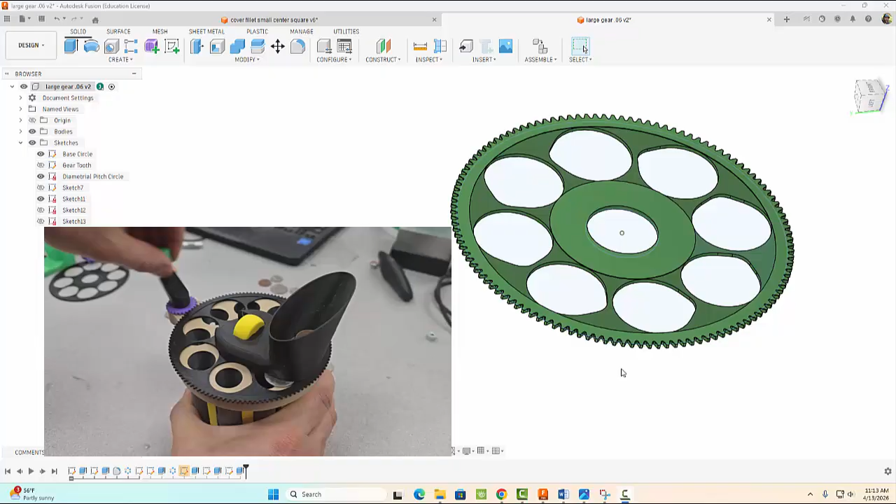In this video tutorial, I'm going to show you how to design the large gear seen here for your coin sorter. So whenever you're ready, let's go ahead and get started.

Alright, so the first thing you want to do is come on up to File, let's do a new part design and select Create New. And to make our gear, we're actually going to use an add-in. So we're going to come over here to Utilities, Add-ins, Scripts and Add-ins, and let's select that guy right there. And then we're going to come on down to Spur Gear, and we're going to hit Play.

And this is a pretty cool feature. It'll make an involute spur gear for you based on these features right here. All right, so we need to go in and edit these values to make our gear. The first thing to consider here is our units, and we can use metric or English. We're going to go ahead and stick with English or standard units.

For our pressure angle, we're going to go with 20. That's a pretty common angle. And then for our diametrical pitch, we're going to set that to 26. All right, the next thing we need to consider is how many teeth on our gear, and we're going to put 120 teeth on there.

And for our backlash, think of that as the clearance gap, the gap between our two teeth. And we want to have a little bit of a gap of about 1 thou or 0.001. For our root fillet radius, we're going to set that to 0.02. And for our gear thickness, that is going to be 0.06. And then for our hole diameter, we're going to set that to 0.98. Once you have all these values, go ahead and select OK and watch the magic begin.

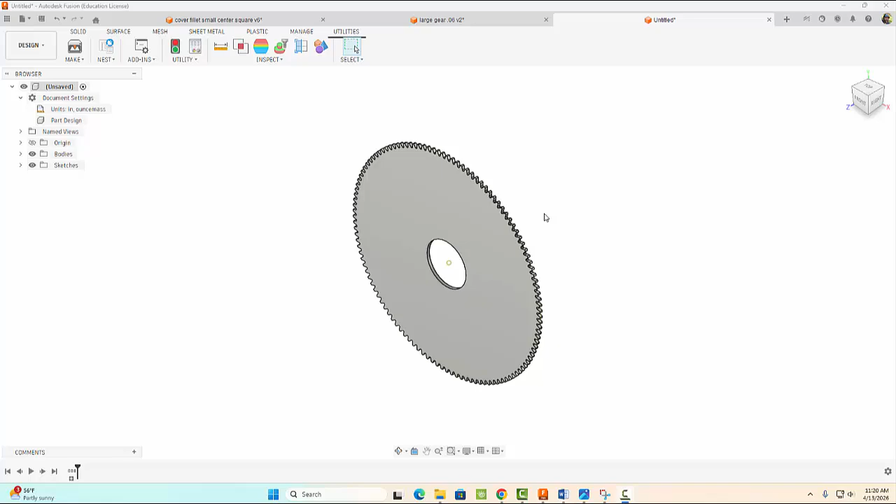All right, and here is our wonderful gear. Let's come on back to solid. Let's go to inspect. Make sure the thickness is in fact 0.06, and it is 0.06. Let's do another inspect. Make sure our hole diameter here is 0.98, and diameter is 0.98. Looks good. All right, now let's go ahead and start a sketch here on this surface right here.

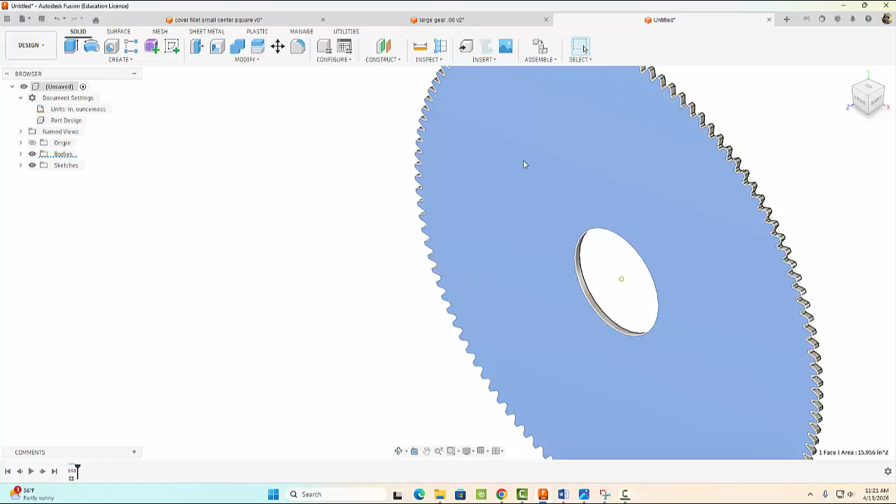All right, the first thing we want to do is do a construction circle. So we're going to go to line type and select construction, coming over to our circle drawing tool and create a construction circle with a diameter of 3.1. Enter.

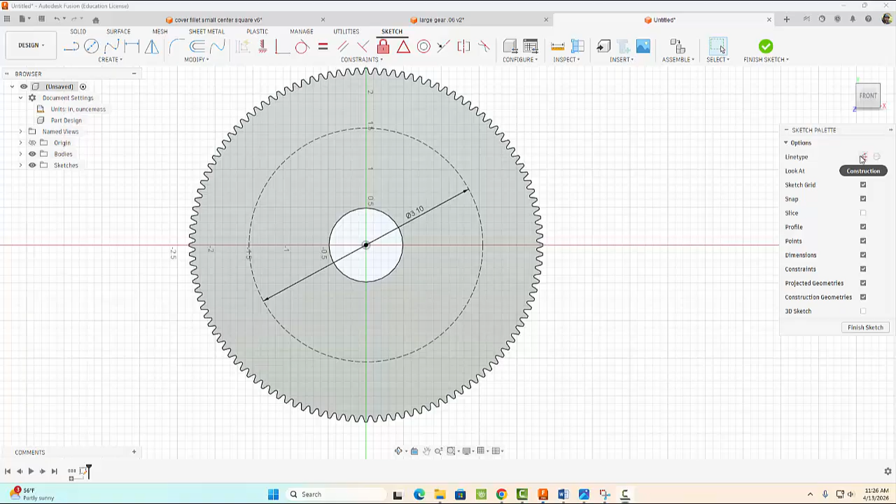And then we're going to come on over to our circle tool, but first we need to take it out of construction mode because now we're going to do a drawing circle here. And we're going to come to this point right here, come straight up, and we're going to do a circle with a diameter of 1.1 inches. And then we're going to use our vertical constraint to make sure this point is in line with this point.

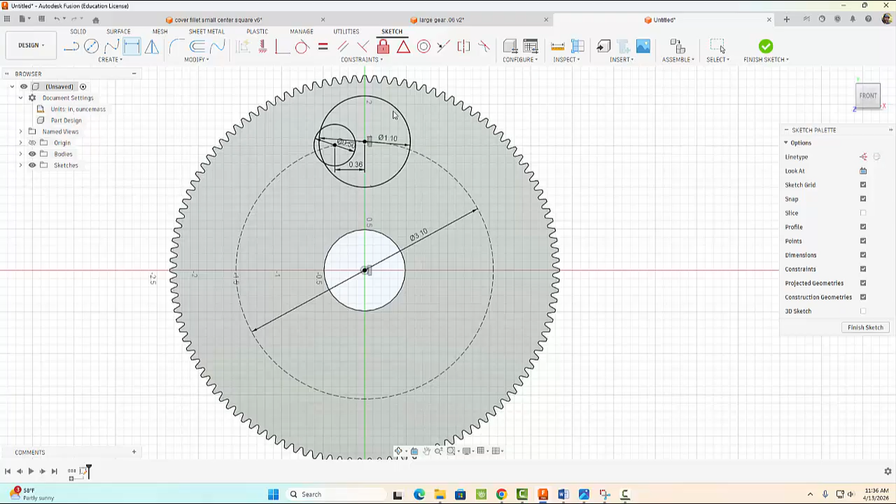Then we're going to grab our circle tool, and somewhere right in this area on our construction circle, we're going to drag out a circle with a diameter of about 0.5 inches. And then we're going to come up to our dimension tool, and we're going to dimension them a distance of 0.36 inches apart. I'm going to zoom in here so you guys can see better.

I'm going to grab my line tool now, and I'm going to start a line on this circle and then end the line on this other larger circle, and make sure it's touching. Click. All right, so same thing down here. I'm going to start a line on this smaller circle, and I'm going to end it on this bigger circle.

Now I'm going to come up to my tangent constraint. I'm going to make sure we already have one here, so I'm going to click here, and then on the bigger circle. So now I have two of them, which is what we want. So I have one here, same thing. I'm going to click on this line, and I'm going to click on the smaller circle. Once that's done, we can come to modify and trim everything here on the inside of these two circles.

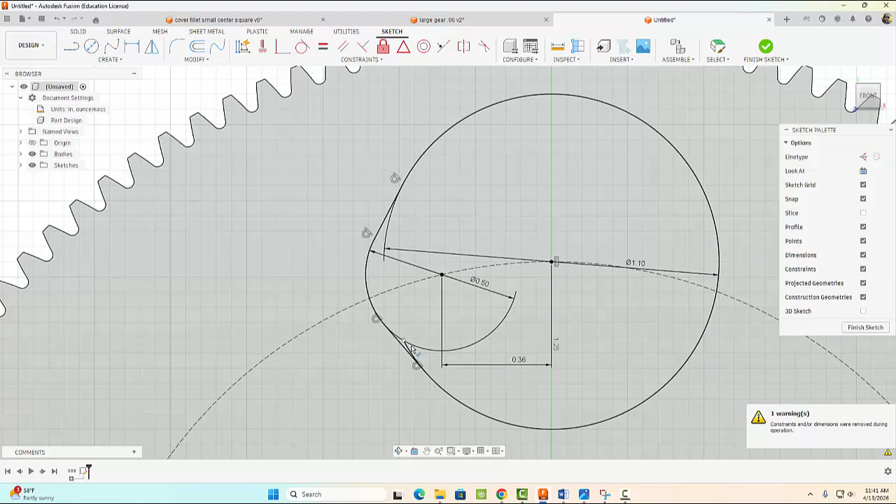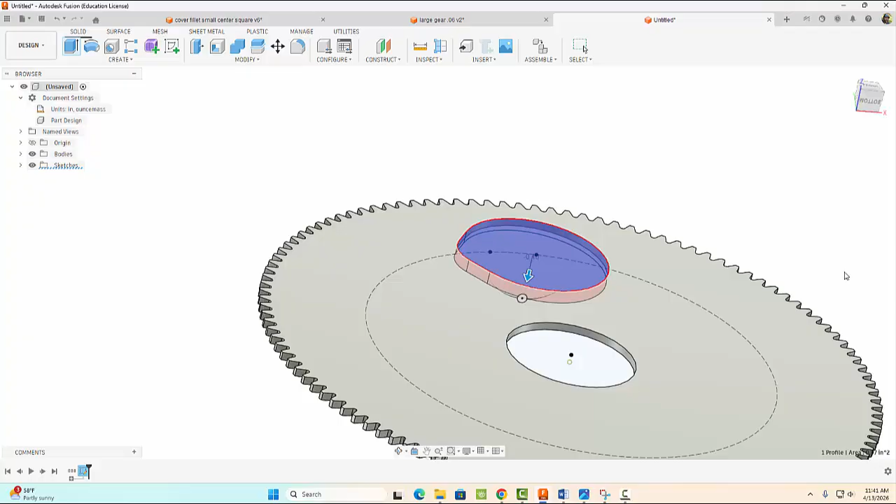Okay, so when you're done, I'm going to hit escape. You should have something that looks like this. Let's go ahead and finish our sketch. And we're going to extrude this portion out a distance of minus 0.1 and select OK.

Now we want to make 8 of these, so you can probably guess what we're going to do next. We're going to come to Create, Pattern, Circular Pattern. We're going to select Features and click on this feature, this extrusion that we just did, and we want to select our axis that we're going to revolve around, we can select this circle right here, set your quantity to 8, and hit OK.

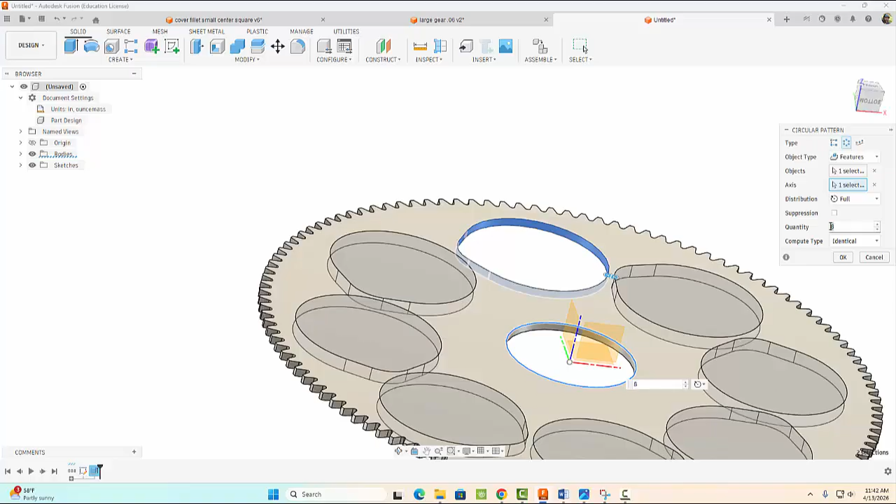All right, the last thing to do is to create a sketch right here on this face, and we're going to draw out 2 circles, one with a diameter of 4.2 and another with a diameter of 2.

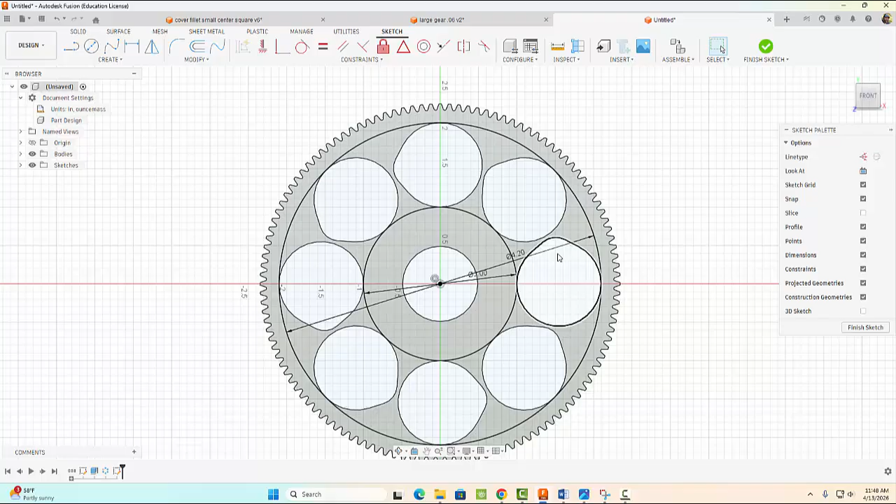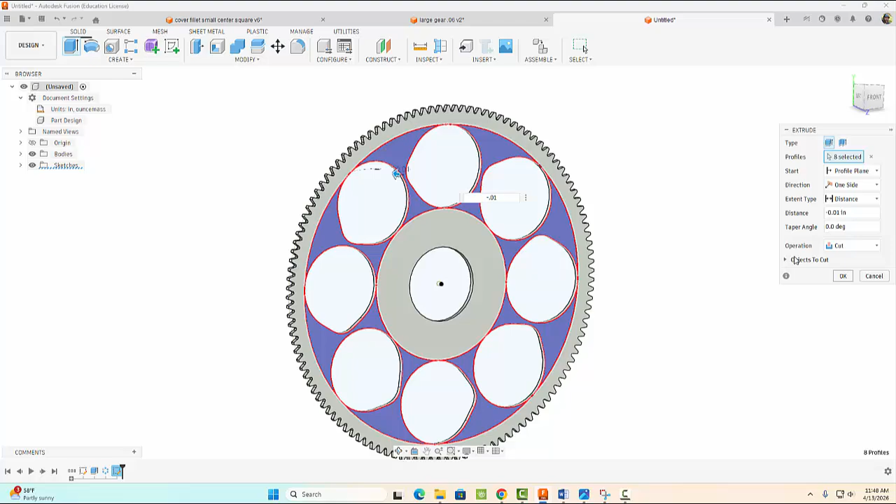And then once that's done, we can finish our sketch, and we're going to extrude these right here a distance of minus 0.01. Hit OK. All right, so when you're done, you hopefully have a gear with 8 holes going around it, and it looks something like this.

Let's come on up to document settings and give our gear a cool color. All right, and when you're done, don't forget to save it.